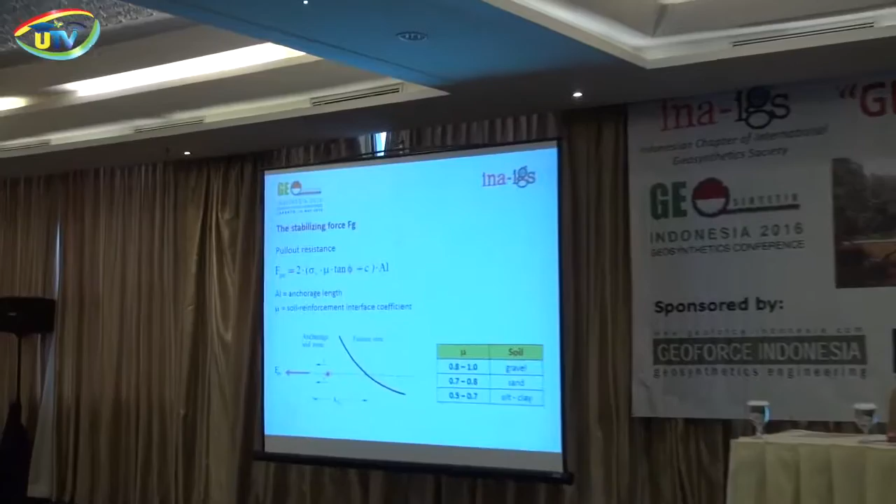So we'll go through these forces quickly. The pull-out resistance is very simple. It's the shear strength developed on two surfaces, because you have two contact surfaces between your soil and the reinforcement. It's the shear strength developed along this anchorage length, called AL, and you have to reduce the tangent of the internal friction angle by a reduction factor, mu, the soil reinforcement interface coefficient.

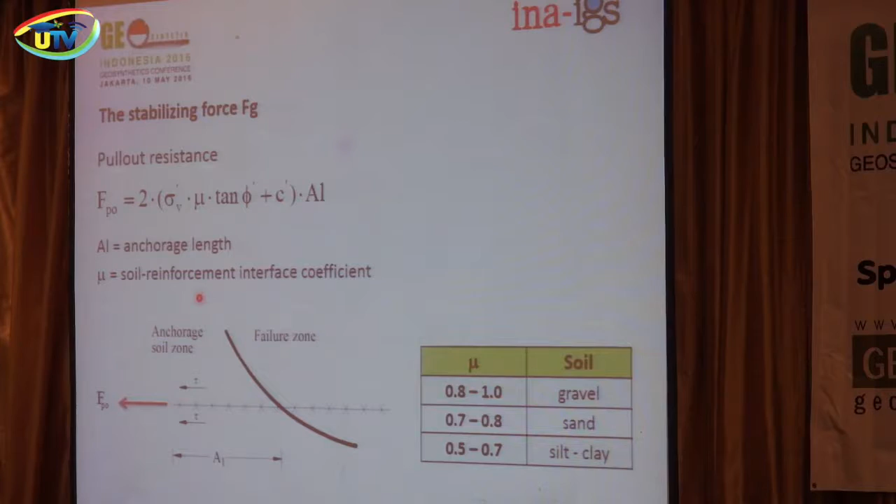This coefficient has to be given by the manufacturer. Normally it's given by the manufacturer, or otherwise you can refer to literature, but it's better if you ask the manufacturer directly how much the reduction coefficient is. It depends on the soil type and also on the reinforcement type. It can be as low as 0.4, 0.5.

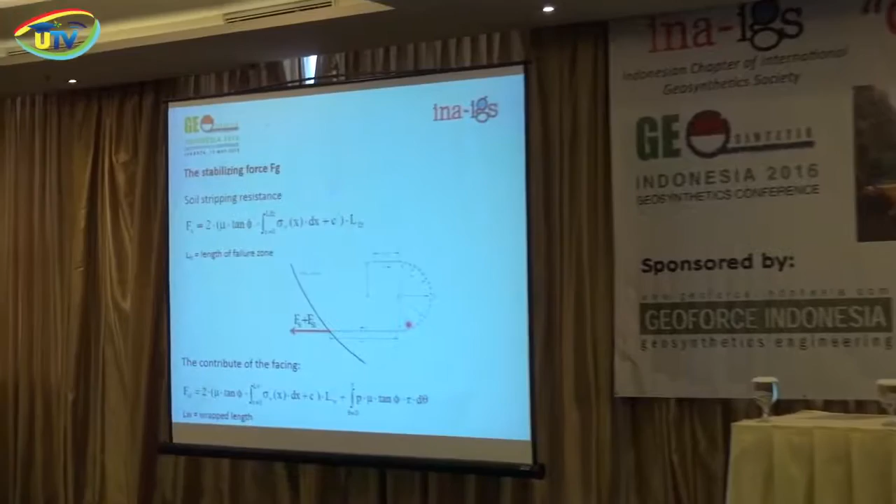Then you have the soil stripping resistance, which is just the shear strength developed on your facing. You can take into account the contribution of the facing, the wrap length, and the facing, and the friction developed on the facing, only in case you have a wraparound geosynthetic system or an anchored gabion system. I think everybody knows what a wraparound system is, but maybe not everybody knows what an anchored gabion is, so I'll give you one slide about that.

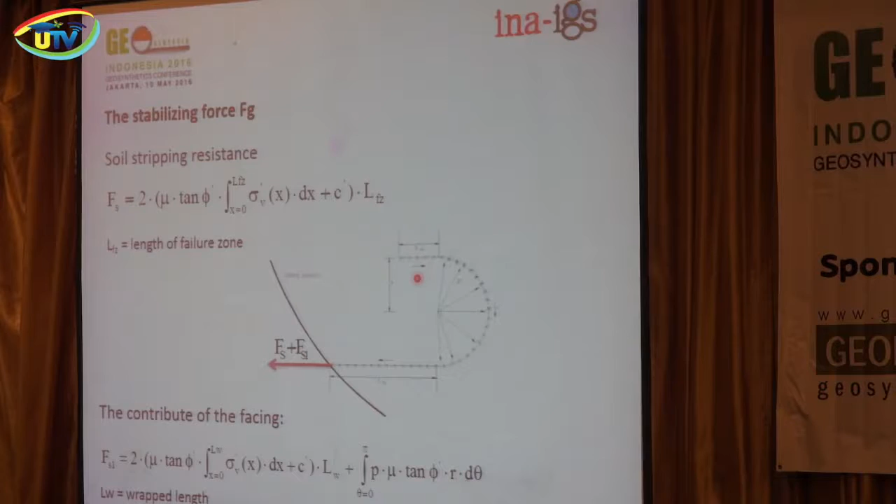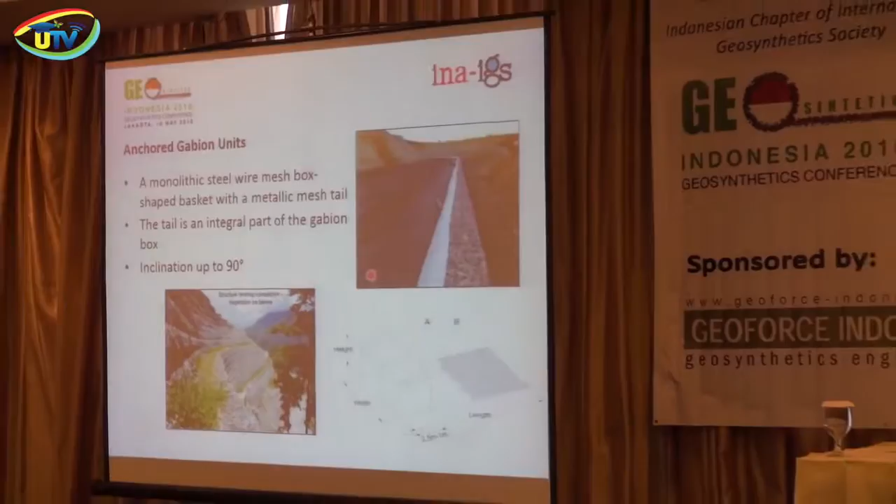So it's just a gabion, but manufactured with a metallic tail that acts as reinforcement. This can be considered working as a wraparound system, so you can take into consideration also the contribution of the facing. This is then filled up with stones and can build up walls up to 90 degrees.

Last, the long-term tensile strength Td is very important. This is not what is normally indicated in your reinforcement technical data sheet. Let's say if you take one geogrid rated 300 kilonewton, of course this force, the ultimate force, sorry, the allowable force cannot be 300 kilonewton, but the allowable force has to be calculated starting from this 300 kilonewton, then reduced by material reduction factors.

These factors depend on the raw material used for the reinforcement, on the manufacturing process, on the testing history and the manufacturer's testing records, then on the backfilling granulometry to evaluate installation damage, on the soil pH, the temperature, and also on the structure design life. So this has to be calculated properly.

I didn't give any further details. You can refer, for example, to British Standard 8006 Part 1, if you want the exact formula and equations for how to calculate the long-term tensile strength. Again, this is something the designers need to ask the manufacturer of the reinforcement. The manufacturer normally has these values and can suggest to the designer how to calculate the allowable long-term tensile strength.

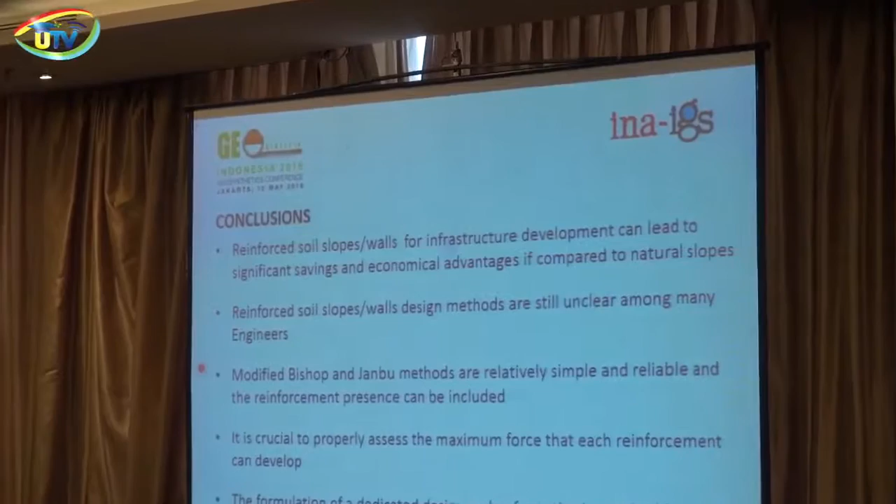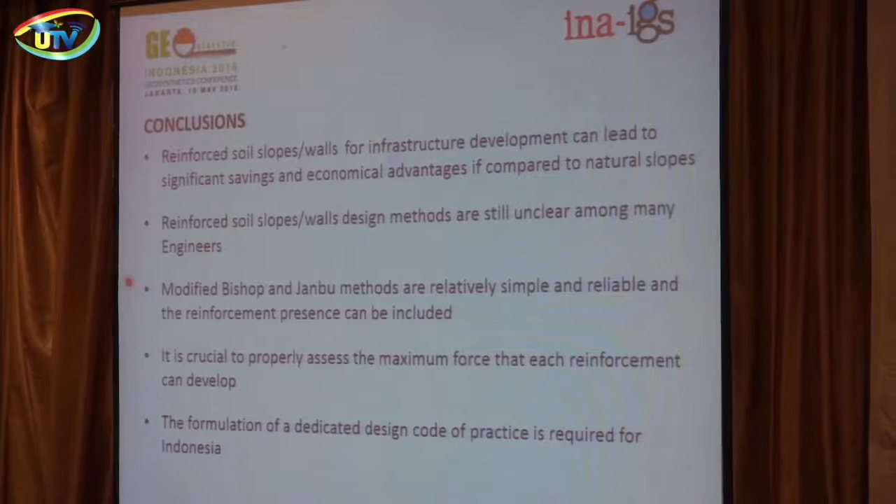So this paper presented, or proposed, two quite simple methods, the modified Janbu and modified Bishop methods, to design your reinforced soil slope. In these methods, the formulas are quite easy and also very well established. You can find them in the literature very well.

But it's very important to properly assess which is the maximum force that your reinforcement can develop in your stability analysis. And also, it is the author's recommendation: it could be very important if Indonesia comes out with a dedicated design code of practice for reinforced soil slopes, walls, and this kind of geotechnical structure in general.

So it would be good if maybe IGS can also push in this direction. It could be good to have such a code to guide our engineers in Indonesia.

I would like to make a presentation on the application of the finite element method in the MSE wall. Let me speak in Bahasa Indonesia because most of the audience is Indonesian. Anyway, my slides are all written in English and the papers, of course, also in English. The overseas participants can look into my paper and the slides.

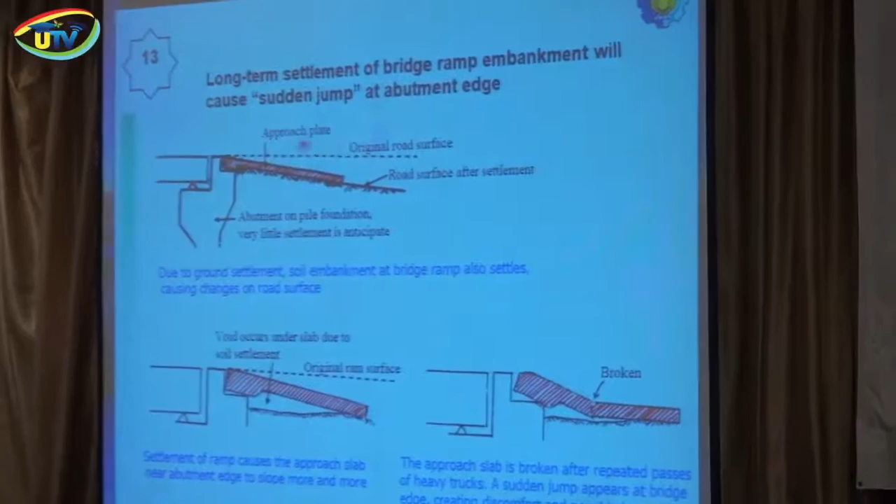We have to have a pile, a bridge on pile. But there's another problem with this: in Java, most of the piles, when you have an abutment on pile, and the bridge ramp here is on soft ground, there's differential settlement. This will settle slowly. Usually Bina Marga corrects this with an overlay, but because the settlement keeps progressing, in a short time this condition will happen again.

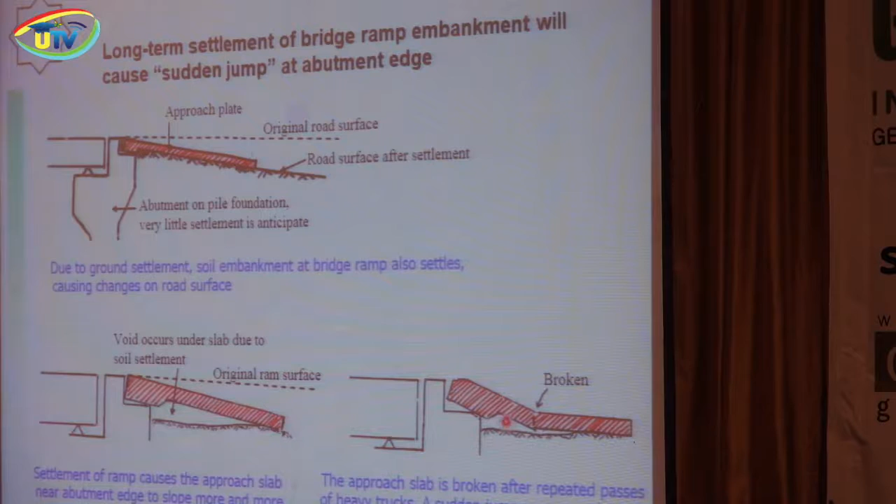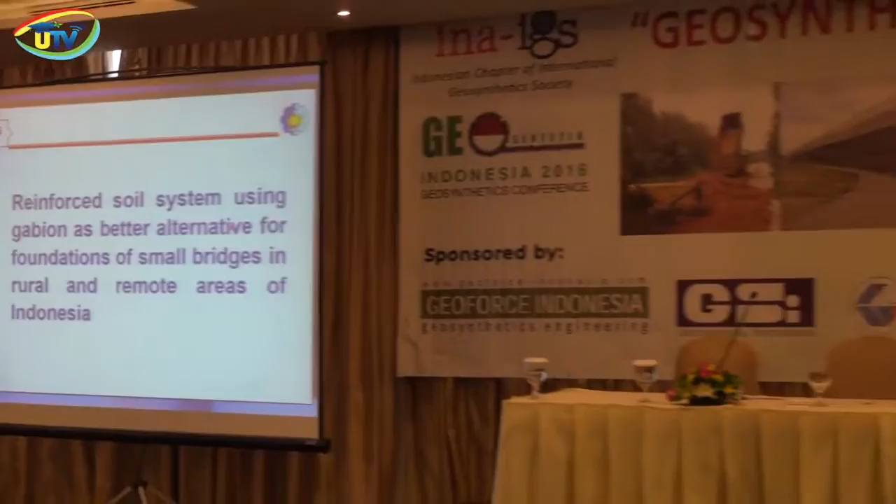All of this can be solved. We use a reinforced soil system, you should get this. I'm suggesting why don't we use this? I don't know, until now I haven't been successful asking for this, but I hope from this time more people will know about it. This type of geogrid could be uniaxial, just for reinforcement, or biaxial geogrid, for gabion.

So we fill up this one with stone, so people can do it. This is not highly skilled work. You can ask any simple worker on any island in Indonesia, train them for a day, and they can just do this because it's very easy. So this is very local technology, you don't need highly skilled people, just simple people to do it.

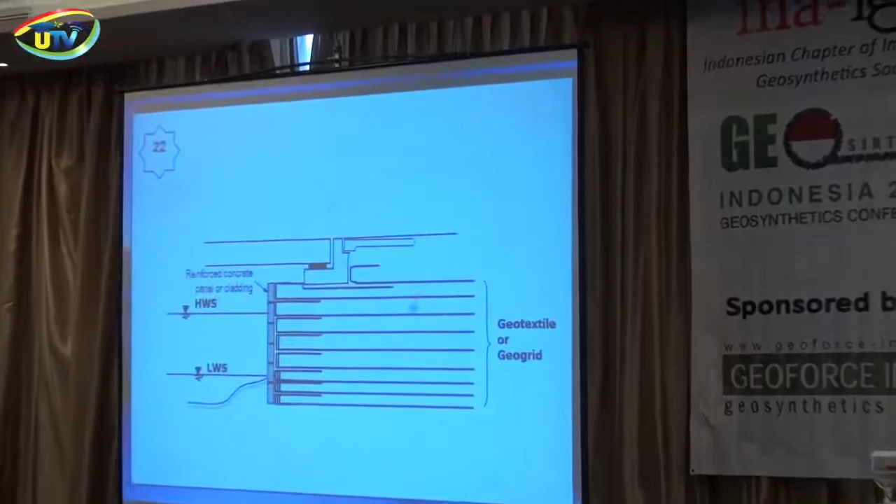This is one edge of it, maybe you can see here. This is just an example, and here's another example. With this method, the bridge settlement will travel simultaneously with your embankment, so there's no sudden jump between the embankment and the abutment.

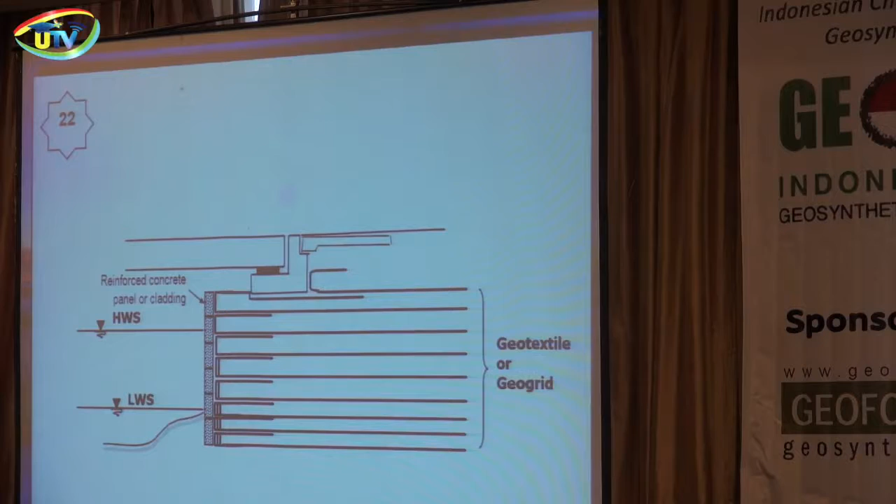Usually the abutment stays and doesn't settle because it's on a foundation, while this keeps settling. How much time do I still have? This is only a few more, okay, another one like this.

This is very simple, already prepared with my students. We prepare something like a guidance for what kind of soil, how many layers, and the height of the bridge, type of soil. So it's like already a booklet for guidance.

There's another one. Of course you have to have a filter layer here, usually non-woven geotextile, so the water can go out but the soil stays inside. Otherwise, if you don't have a filter layer, the soil will slowly go inside and become less dense, and this can settle. But this way, hopefully it will settle uniformly.

So I think this is the advantage of the reinforced abutment: it does not require heavy equipment to install, relatively low cost. The abutment may settle with the abutment ramp, and construction and installation could be labor intensive. This is appropriate for some islands, especially remote locations where you couldn't send heavy equipment.